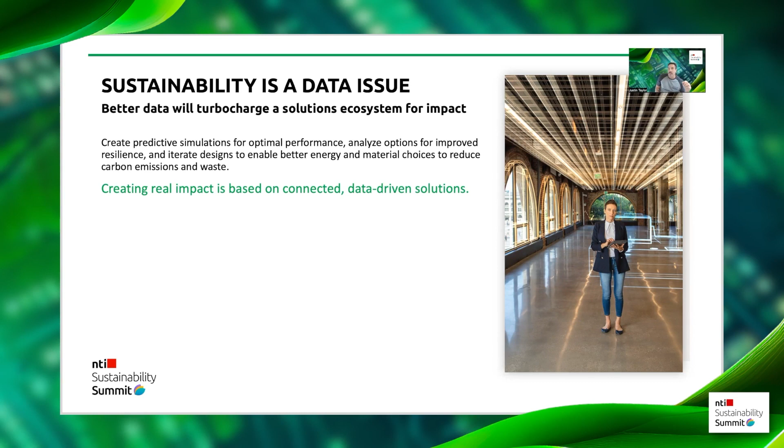Let's take an infrastructure twin. A lot of people are familiar with tools from Autodesk such as InfraWorks or Forma. But how accurate, what can we get out of these tools that allow us to understand the environment?

Here we have a model of the Autodesk office in Toronto, Canada. We can use the model generation tools to quickly bring in existing data to create a structure. But what is the accuracy of that?

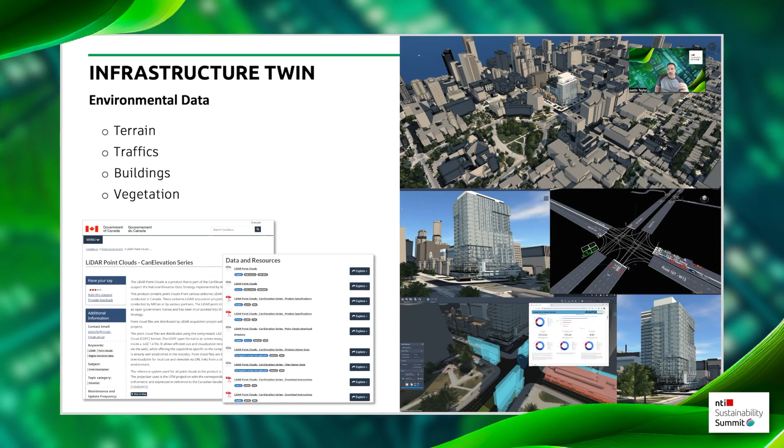What a lot of people don't know is that we can import additional data into these packages. So we went into the Toronto government website and downloaded the latest LiDAR information freely available from government. We downloaded all the information around the mature trees around the city, and the government's data analysis on how many vehicles are traveling at different times of day, the frequency, etc. All of this data is freely available and you can get it from most governments.

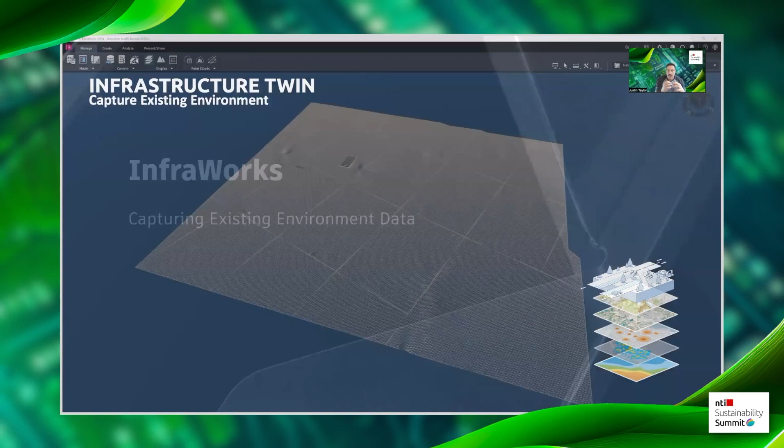That data was brought into InfraWorks, and this short video shows how that data can be brought in and layered to build up a very, very accurate, high fidelity replication of the city of Toronto.

Here we can see the LiDAR data coming in, accurate to around 2 meters on a grid. We can see the road network coming in. Next, we have the trees—these are the positions of the real mature trees around the city block around our office.

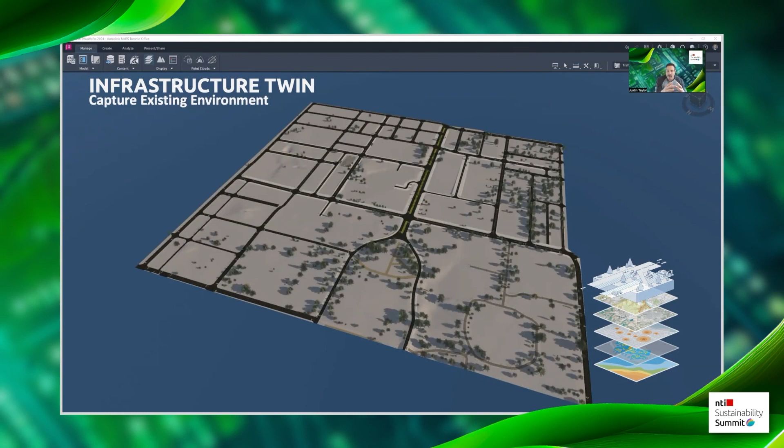And here comes the Revit model, the design model. The surrounding buildings are much more accurate than the standard ones InfraWorks can bring in. These were available, as I said, through the government website, giving us a super high fidelity model of the city.

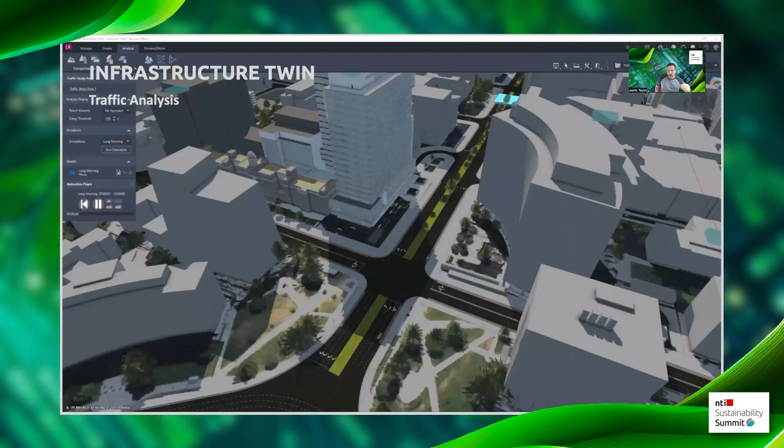But what next? In the same software inside of InfraWorks, we import that traffic data. InfraWorks has a very powerful traffic analysis engine. First, we can see the traffic and traffic flow around the junctions at different times of the day based on the government data.

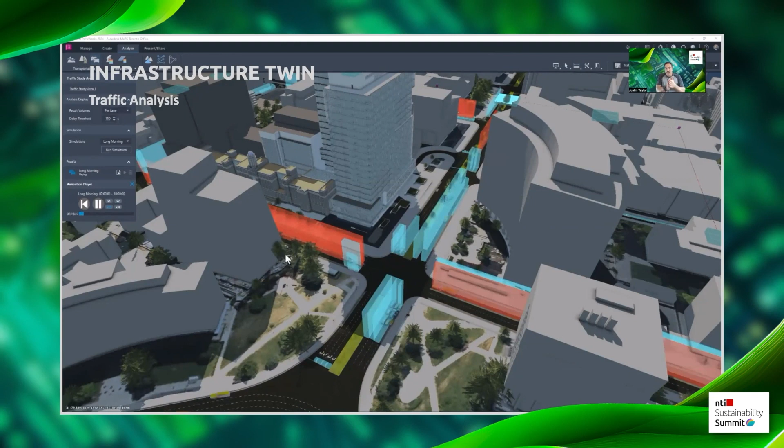We can start to see how the traffic is backlogging and sitting still with idling going on, so we can see the efficiency of a network. We can go in and play around with the junction design, or simulate traffic lights and changing of the sequence to see if we can improve this information. It is a very effective town planning tool in terms of logistics.

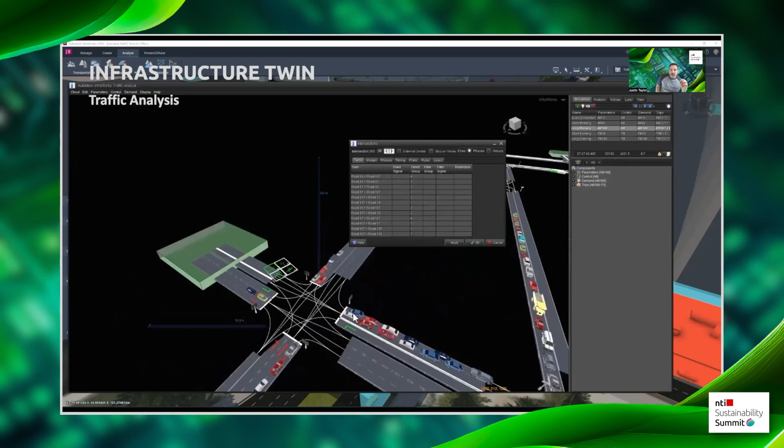The other thing InfraWorks can do on top of this is export that traffic information, so out to Excel we can export all the traffic data and the emissions. Here's an example where it's been brought into Power BI, to make it easier to digest.

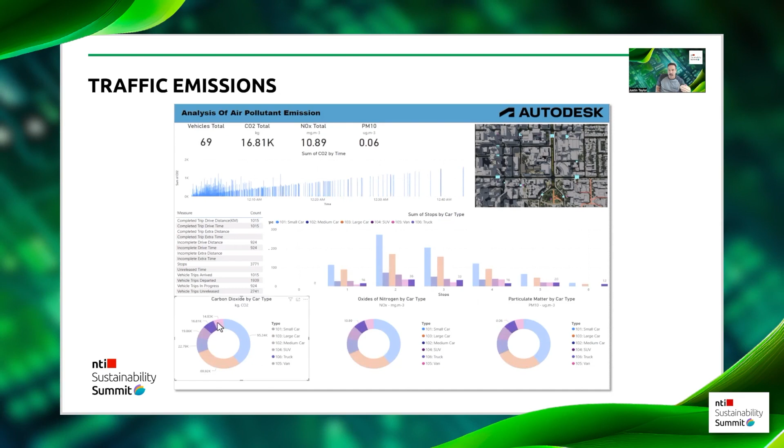We can see the number of vehicles, the CO2, the NOx, and the particulates at any given point of the day, and the type of vehicles producing those emissions, so we understand how polluted the area is. This is useful in existing scenarios or if we're building new layouts and new town planning, etc.

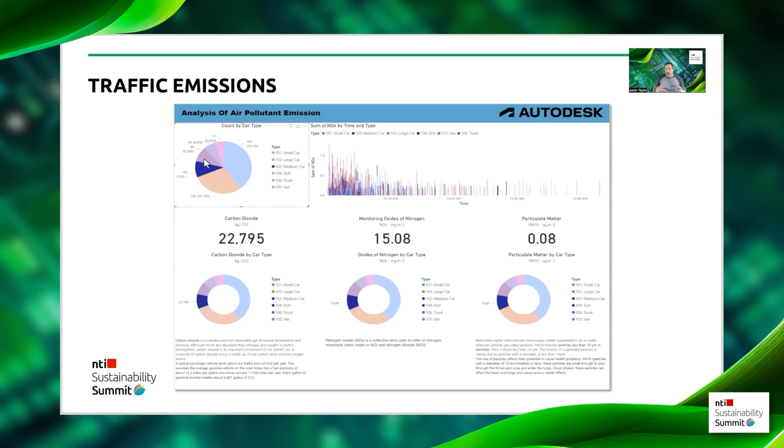Now we need to look at how we can mitigate this. In this example, we bring the same traffic information into Forma, and we can analyze the noise around the same junction around the Autodesk office. You can see here that in the area in front of the office, just off the road, we're getting up to noise levels of around 110 decibels, which is pretty uncomfortable for people and wildlife.

If we want to start creating biodiversity in our cities and improving the overall health and well-being, we need to reduce noise and pollution.

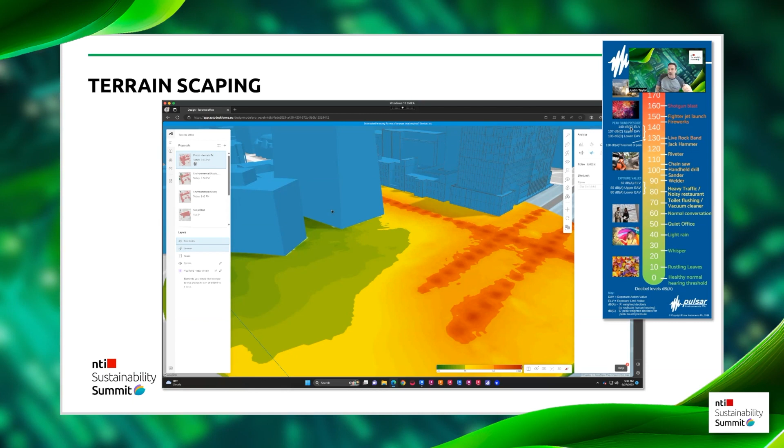One thing we can do is look at terrainscaping. Forma has a bidirectional link with Revit, and in Revit I updated the terrain to create a very simple earth bank or berm. I brought that back into Forma and reanalyzed it.

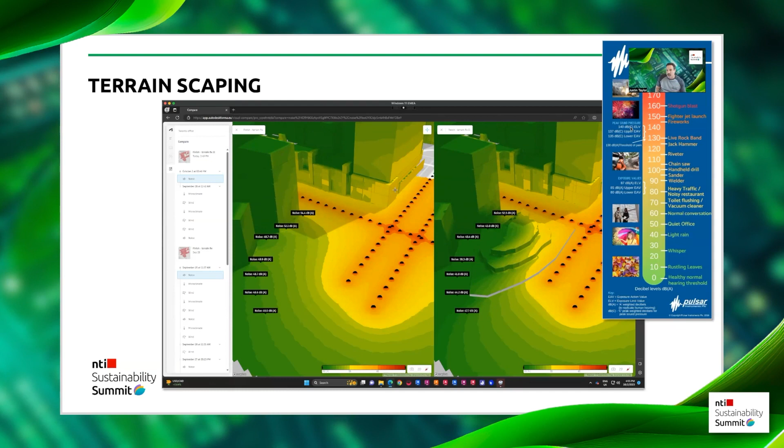You can see immediately there's a drop of around 10 decibels just through doing this, and that's not including adding planting or further sculpting. So we can see the noise level has come down.

We can also see that earthworks is altering the prevailing winds as they come in, again analyzed through Forma. We can see it's starting to lift up the air faster and away from street level, so the pollutants are being brought up. It's reducing wind speed and also lifting out the pollutants. So here we can actually see our design is having a positive impact through the analysis.

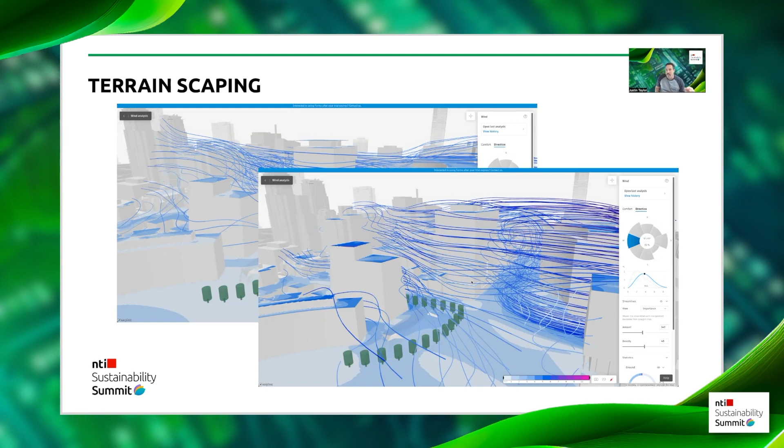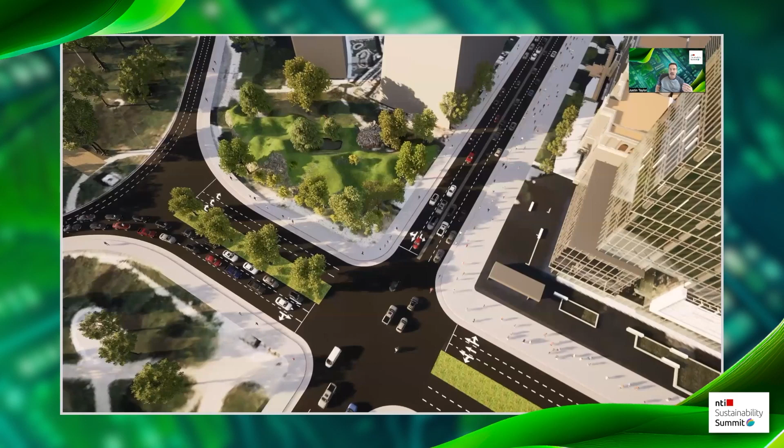Finally, that information from InfraWorks, the InfraWorks model is exported and brought into Twinmotion. This allows us to create high definition animations and visuals of what this design would look like, for planning reasons or community buy-in. It's also important to note that Twinmotion has libraries of indigenous plants for different regions.

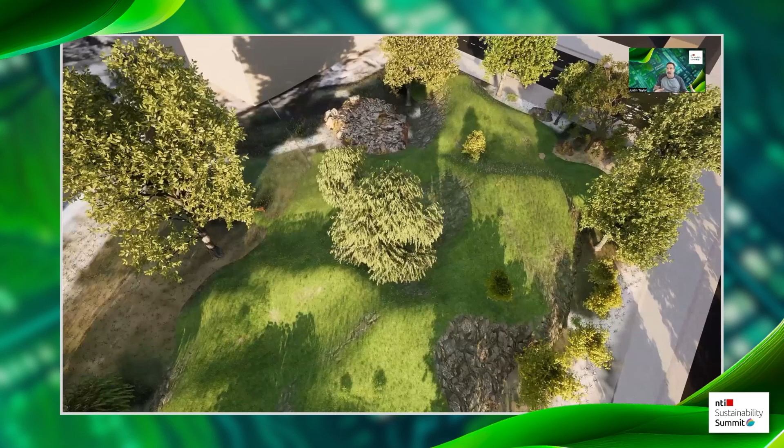So these aren't just any trees or bushes that are dropped down, these are ones that would actually grow in that environment. You can see how the overall site has a much greater aesthetic appeal. We're increasing biodiversity and reducing noise and pollution.

Other things we can look at: what if this was an existing building, but we wanted to invest in renewable energy? Well, again, Forma allows us to quickly analyze the overall site, the facades and the rooftops of the building, and understand the sunlight and the potential for photovoltaics.

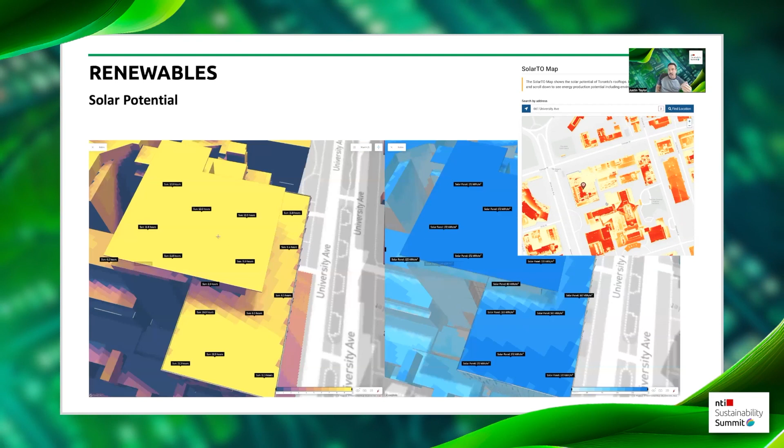The model can be brought into Revit and greater, more granular analysis can be done on different roof elements. So we can start to understand not only the PV energy production potential, but the payback time - how many years it's going to take to pay back on a particular asset.

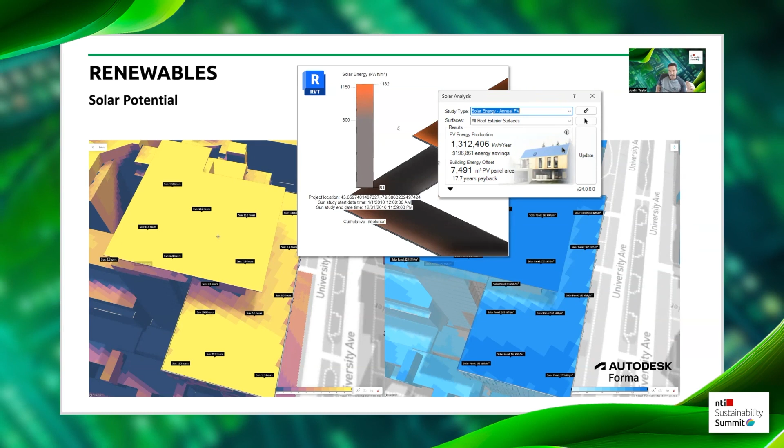We want to look at the life cycle, as I said at the beginning, this connected data from start to end. So what about the creation of the solar panel in the first place? Here I've modeled up the solar panel in Autodesk Fusion, a design and make tool, and I've used all the materials it would normally be made from - whether it's aluminium, steel, plastics, or the silicon cells themselves, they've all been modeled up.

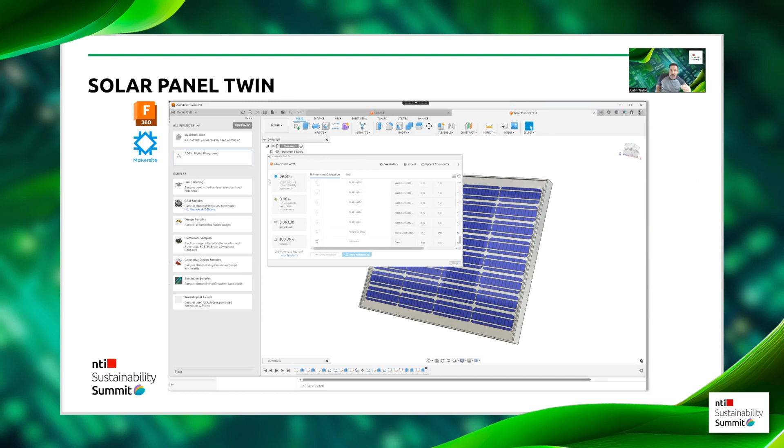I've connected the model to something called Makersite, which allows me to assess the embodied carbon of this design, so I understand what its footprint is as an object. I can then create an environmental product declaration for this. Not only that, but it's telling me the overall material and manufacturing costs as well, so I can start to weigh up different design options - cost versus carbon.

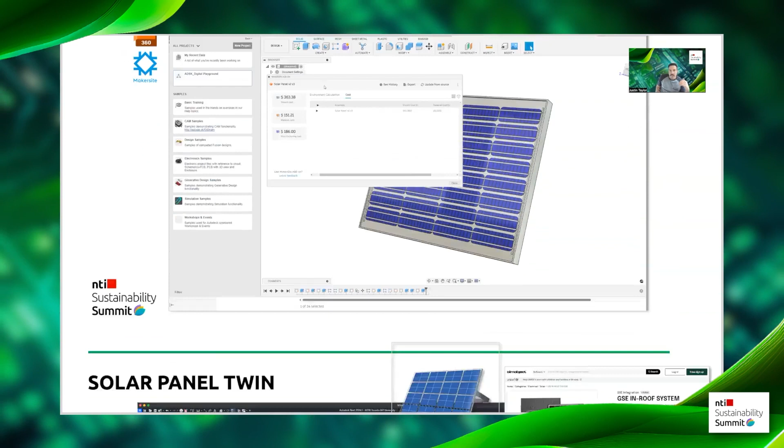From Fusion, I can export this solar panel and bring it back into Revit. I can position this on the roof accurately, rotate it and angle it to its true inclination, and then assess the photovoltaic potential of just the solar panels to get a greater accuracy of the energy I can produce.

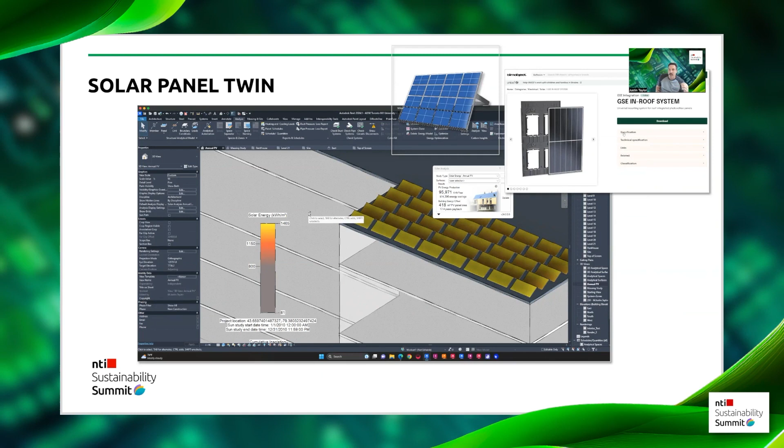Towards the end, the operation and maintenance, the life cycle, that same model from Revit can be pushed into Autodesk Tandem. It can be connected up with operations and maintenance documents, EPDs - environmental product declarations - and connected to monitors, sensors and feedback panels. So at any given point we can understand the energy being produced at any given time, and whether a solar panel is working optimally or not, or if there's a problem. So we're creating a digital twin of that building.

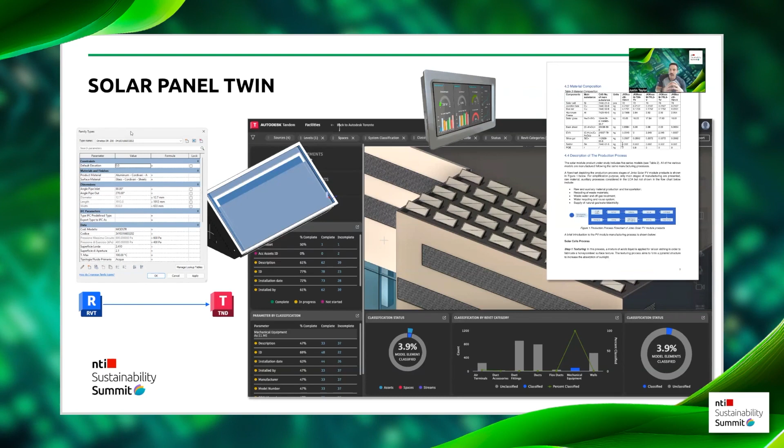So let's look at the life cycle and start to understand how data needs to be, or can be, connected to improve this overall life cycle. We hear a lot of talk about material passports. They offer sustainable material selection, health and safety improvements, value preservation, regulatory compliance and certification. But how do they work in reality?

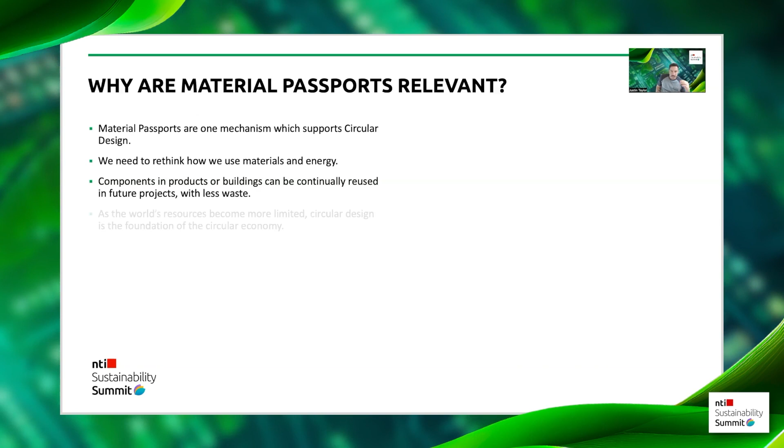Why are they relevant? Well, they're a mechanism which supports circular design, as I mentioned. They allow us to rethink how we use materials and energy - we want to start reusing and creating this circular environment. They allow us to understand the products or materials in the building that can be continually reused in future projects, i.e. less waste, less use of virgin materials or brand new manufacturing. And as the world's resources become more limited, circular design is the foundation for the circular economy. We have no choice - this is a route we need to go down.

This diagram shows on the left a traditional process where we take from the ground, we make, and then it goes into landfill - at the end of the day the building gets knocked down and goes into landfill. With a circular economy, we start off with resources, we manufacture, we consume and use, and we try to recycle or downcycle as much as possible.

So we're putting as little as possible back into landfill. On the right, there's an example from BAM. This was a building produced in conjunction with Arup. It's a circular house where they borrowed all the materials from a different project, and it was returned after disassembly, proving that it could be done.

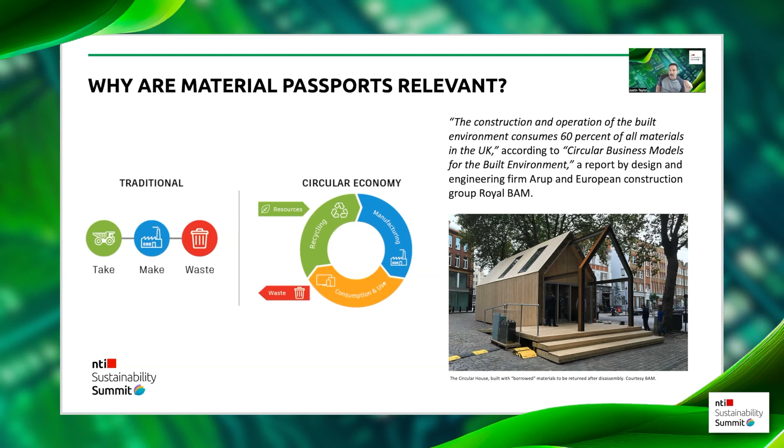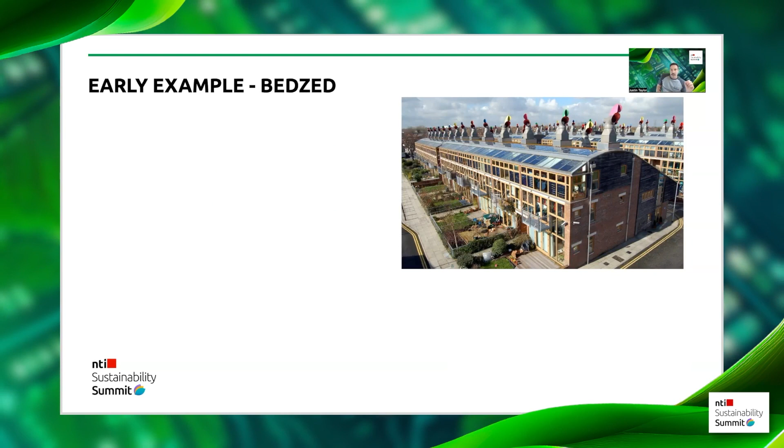There's been quite a few examples of circularity and reuse of components or materials. This is an early example from BedZED. Beddington Zero developed this housing development in Hackbridge, London. It was designed by Bill Dunster and Partnerships in conjunction with Ellis and Moore Consulting Engineers. They reclaimed 98 tons of steel for this development.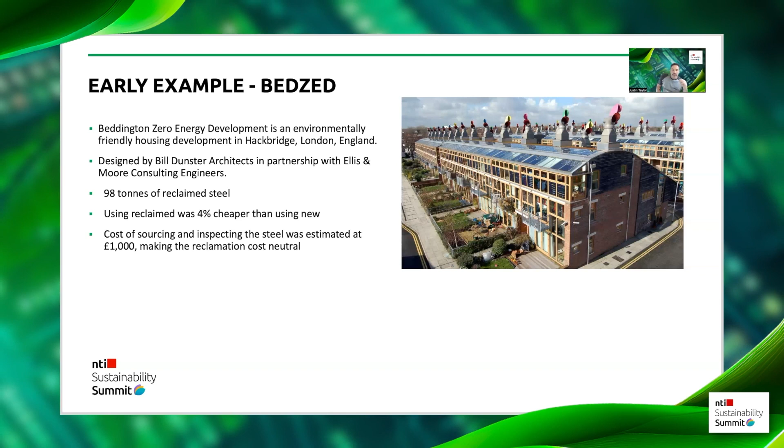They estimate it was 4% cheaper than using new steel, so there was a cost saving as well as the carbon saving. The cost of sourcing and inspecting the steel—because you can't just take something that was structural and reuse it, it has to be inspected to make sure it's right—they estimated was around £1,000, making the reclamation itself cost neutral.

81,500 kilograms of CO2 was saved for the reuse of that steel, and 2,500 gigajoules of energy was saved. So quite significant just on this one development.

Overall, 52% of the materials were sourced within their target radius in London. So they set out to understand what buildings were coming down, where they could get material to reuse it, and they set this target for the distance they would travel, because transportation incurs carbon costs through fuel, etc.

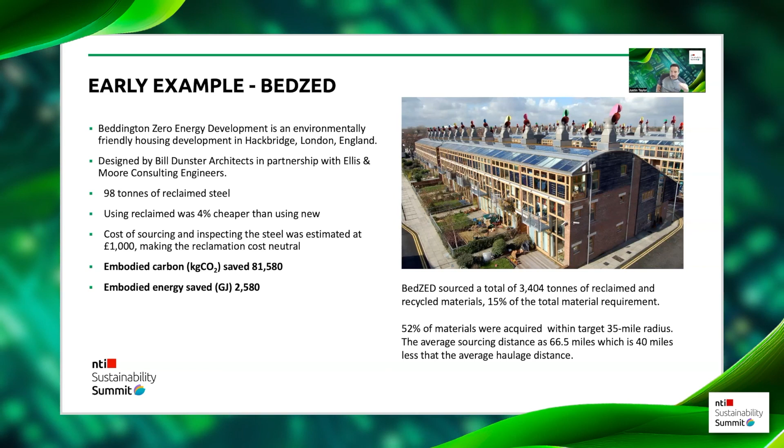Now, they did face issues. This was pre-material passports, pre-digital logbooks. Some of the issues they faced is that it required a team of people to source the materials. They had no way of knowing what buildings were coming down and where, so they had people calling around all the time. There was no centralized knowledge base, if you like. It required additional processes, such as inspecting the steel for any cracks or distortion, sandblasting, zinc treating it to make it rust-proof again.

A different way of thinking around this is that the structural engineer carrying this out now holds the risk associated with the integrity of the steel. And clients are not always willing to accept reclaimed elements. Not all materials are easy to reclaim due to the way things have been constructed.

So again, this is about our ability to change our mindset in the way that buildings are put up. We need to design for disassembly. The use of adhesives, for example, makes it very difficult to separate materials and reuse them. So the use of nuts, bolts, and screws is far better for recycling.

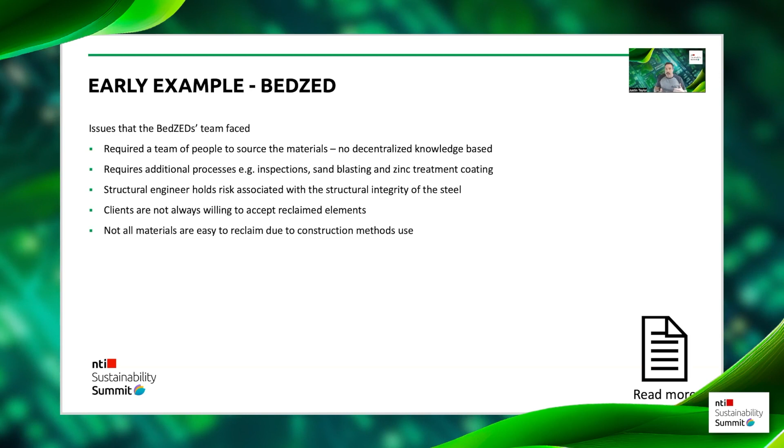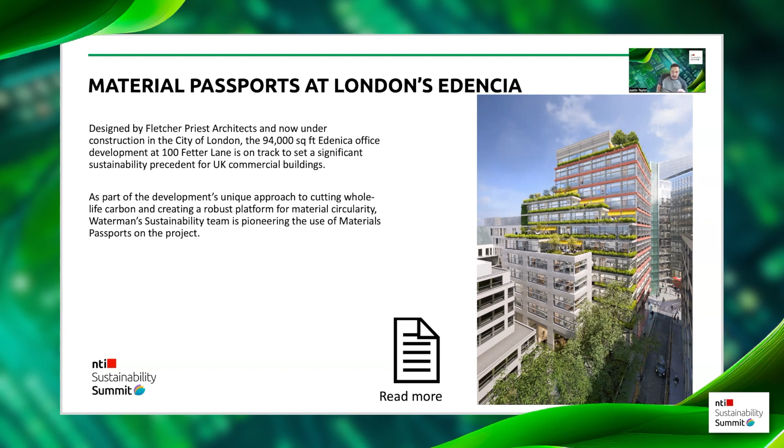Now, recently, Fletcher Priest Architects undertook a project, the Edencia office in London. As part of this development's unique approach to reducing whole life cycle carbon, they set out and developed a very robust platform for creating material passports on the project. This presentation will be made available to you, and there is a read more link that takes you through to the full article about this.

But at the end of the day, they created a platform for material passports that captures information. That information itself is wrapped up and encompassed inside something called a building digital logbook. So imagine it's like a supercharged digital twin of a building, and it contains all the material passports, which are linked to the individual elements, components, or materials inside the building.

A digital logbook is an all-in-one information tool designed to encourage data transparency and availability, and allows us to understand what the building contains, where it is, and how to access it. With the material passports, it also captures exactly what has happened to a component or building element throughout its life cycle. For something like an air conditioning unit—where it came from, the manufacturer, its embodied carbon, its operating requirements in terms of energy, how often it's serviced, has it been serviced—this entire history is wrapped up inside the material passport and then inside the digital logbook.

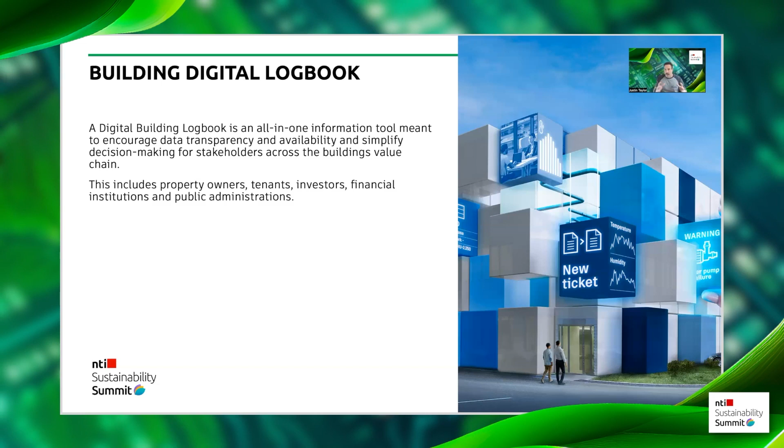Now, along with all of this data comes the problem of accessing only what you want and not being lost in a sea of data. We need to look at ways to construct and connect our data to make it readily accessible to those that need it.

Here's an example of a hospital head wall where all the gas, electricity, and medical equipment is connected into—it's a complicated piece of prefabricated equipment.

And it can be used by many different people, personas - the patient, medical staff, engineers, construction managers, mechanical engineers, etc. How do they only get the information they want about that component and not get lost in this sea of irrelevant stuff to them?

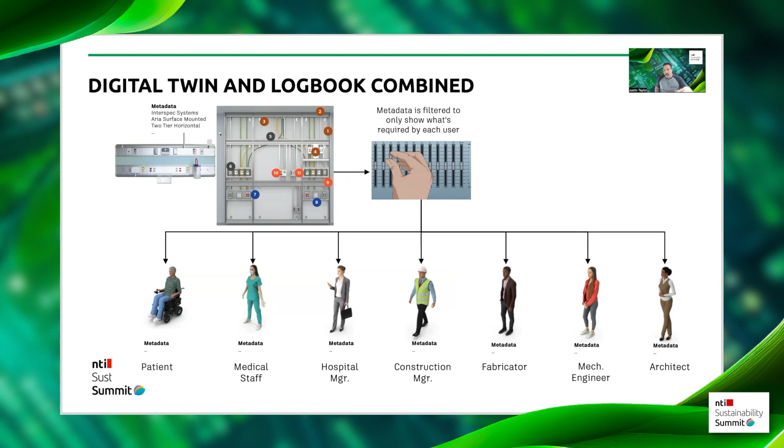Well, this is where two forms of classification come in. First of all, we have taxonomy, which a lot of us are familiar with. Software such as Revit does this very well, pretty automatically. We create a new project, call it a hospital, create zones, departments, and levels, then create rooms and put equipment in those rooms. Revit has the capability that the equipment already knows what room it's in, what floor level it's on, what department it's in, and what project it's in. So the taxonomy is fairly straightforward, and it varies slightly depending on the particular persona that's accessing that data.

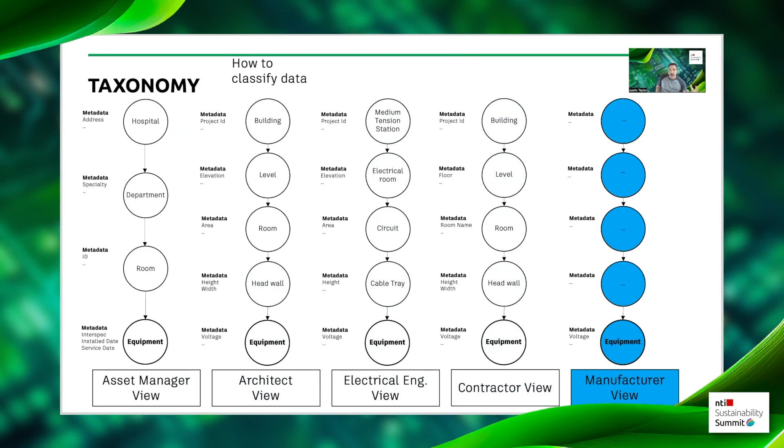But if we move forward with digital logbooks and digital twins, we also need to look at ontology, which is the way that we capture rules and constraints. This allows us to provide actionable insights. So the same head wall, imagine that it needs a power socket replaced. The taxonomy tells us that the power socket is in the head wall, in a wall panel, in a room, on a ward, in a department, on a floor, and in the building. So it tells us how to get there.

But in order to change that power socket, we need to understand that it's connected to electrical conduit with a wire in it. We need to understand all the information around that circuit. Where is that circuit connected back to? What switches or fuse boxes do I need to go to in order to isolate that circuit? Who else is it going to affect in the hospital, if anyone?

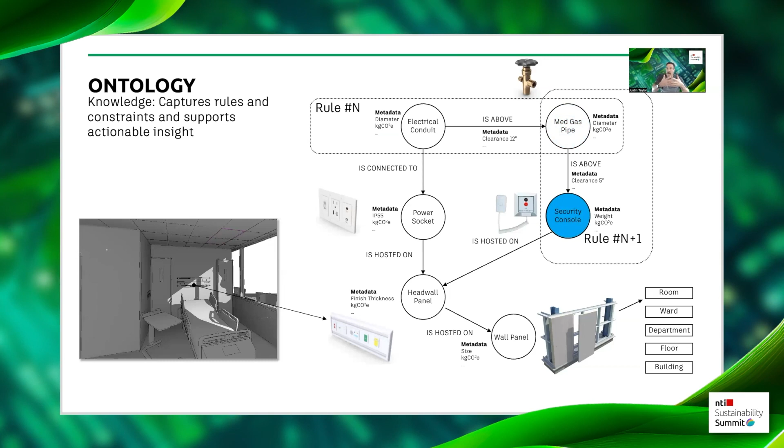Not only that, but if I'm working on that electrical conduit, I need to understand there is a gas pipe above it. Is there a risk that I could break that gas pipe? If so, I need to shut that gas pipe down, and again, where does that go back throughout the facility? What do I need to shut down? And the same thing with the security console. So there are all these rules that are interconnected, and they need to be built into the digital twin.

Here's just a quick final example of that kind of information coming into a digital twin. This is Tandem. You can see here there is a valve, a mechanical unit, that's been selected. It tells me all the information coming from Revit about its description, who it's installed by, the manufacturer, the model number. It shows me a link to the operations and maintenance manual, a link to the product data sheet, the EPD, the warranty documents. So I can go and filter and grab any information I need about that component very, very quickly.

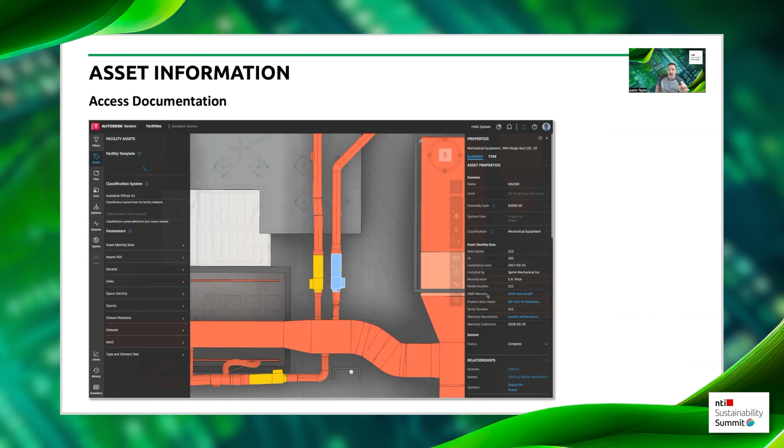And the documentation will open up.

But the digital twin can also act as a material bank. There is a terminology called BAMBS, buildings as material banks. So again, inside of Tandem, I can search for different types of material, and you can see the colorized image is showing me whether it's steel, whether it's concrete, whether it's brick, etc.

So again, if my building had a date where it was going to be decommissioned, and I was putting up a new building, I could do a search and say I'm looking for a certain type of steel. The digital twin would come back saying, right, this building contains that type of steel, this is where it is. And it could have documentation that explains how I need to disassemble that building to get to that steel. It would come along with all the material passports as well, if anything had happened or been altered during the lifetime of that building.

Here's the final slide again, showing a prefabricated slab. You can see here there is a link to the environmental product declaration, which brings up a unique identifier and tells me everything about that slab - what it is, what type it is, its dimensions, its fixing methods, so how can I take it apart, when it was manufactured, installed, and the amount of steel inside of it.

And it's controlled via a QR code. So from the manufacturer's site, up in the top right, you can see a photograph of those slabs. There's a QR code on there. We use the same QR code that is carried across onto the construction site, used by the contractors during installation, and used at any point throughout the building's life cycle, including disassembly, and if those materials can be used again.

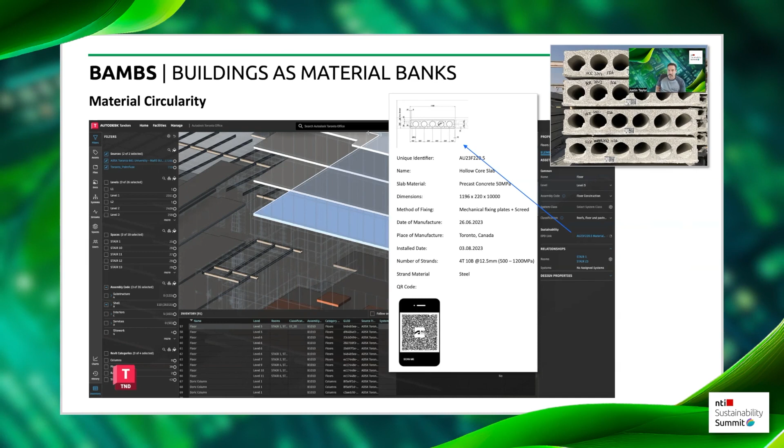As I said, we need to design for disassembly. What goes up must come down, and it needs to stop going into landfill.

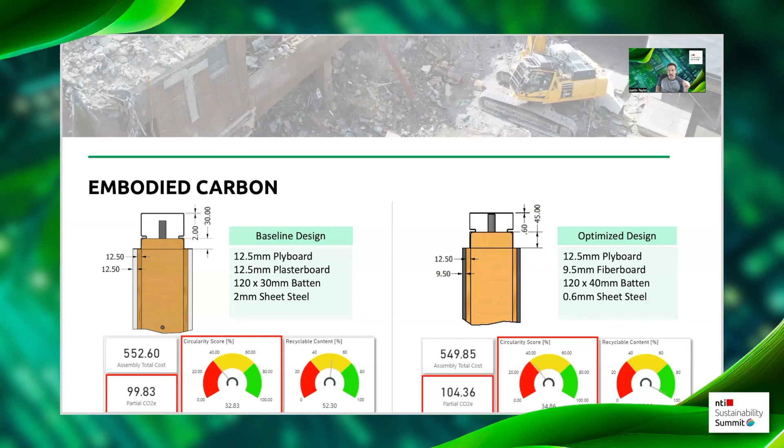We've got a number of ways of understanding how efficient a building is. This is a simple Power BI mock-up of a project I did with a client, where we created a capability that during the design process—these are prefabricated wall panels—the designer could test out different material types, whether it's plyboard, fiberboard, or the thickness of the sheet metal. The dashboard fed back, providing the designer with the embodied carbon and also the overall circularity score.

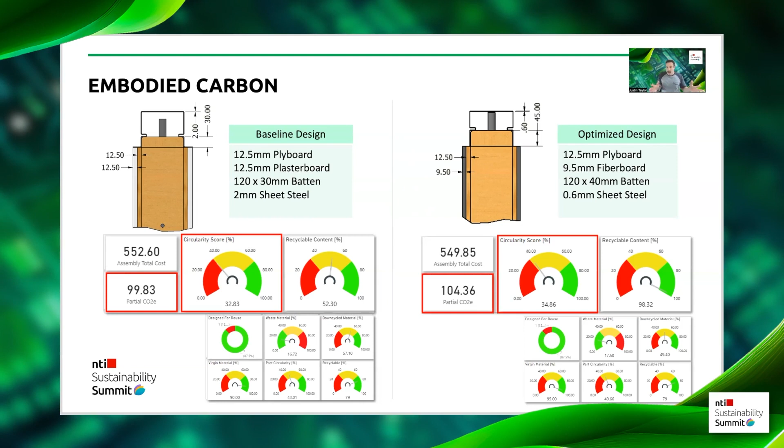How much recycled material is in there? Could it be recycled, downcycled, or reused? This provides the designer the ability to compare two different designs. You can see the design on the right has a higher embodied carbon score, and you might initially think we better go with the one on the left. However, the one on the right has a greater circularity score, so over its entire life cycle, it's actually the better option in terms of sustainability.

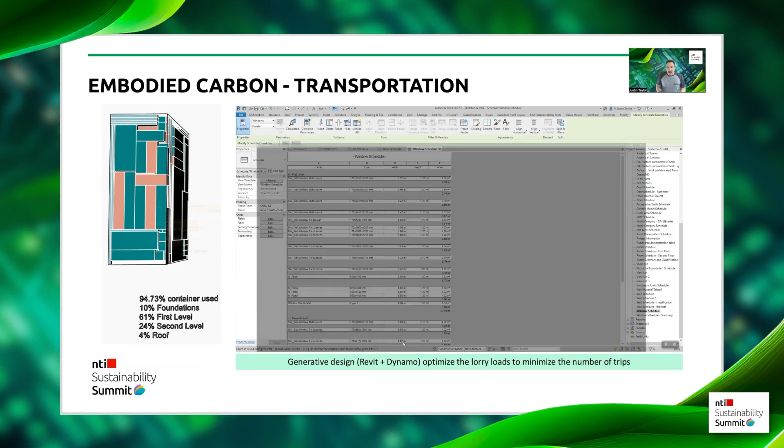We can do things around transportation. This is a Revit model of a house with prefabricated panels, and we want to understand how to get these panels from the factory to the site as efficiently as possible. Using Dynamo, we can create a script where we enter the size of the lorry and its capabilities for transporting bulk materials—we can set the width, the length, and the height of the container.

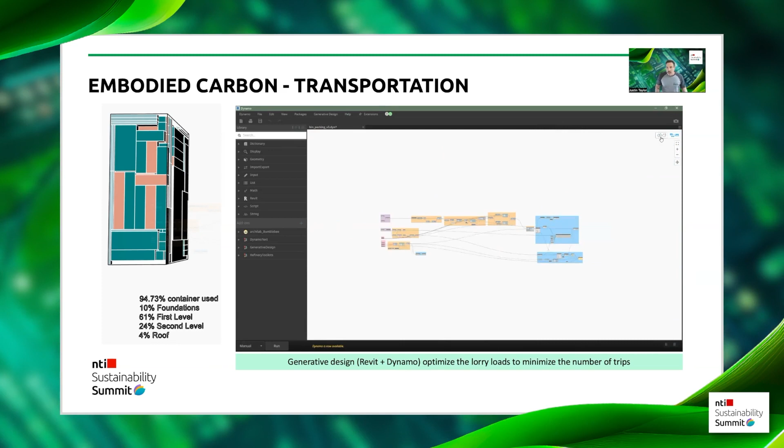It will look at the panels in the model, run an assessment, and tell us how many lorries we need and what needs to go into each lorry so we sequence the build of the house properly. Using Revit and Dynamo, we can understand in much greater detail the logistics required, and stop wasting trips with half loads or partial loads. You can see the number of containers and what needs to go into each one, in order.

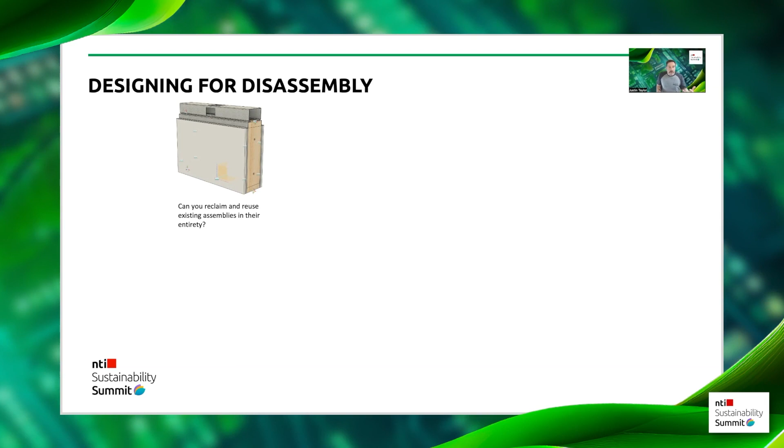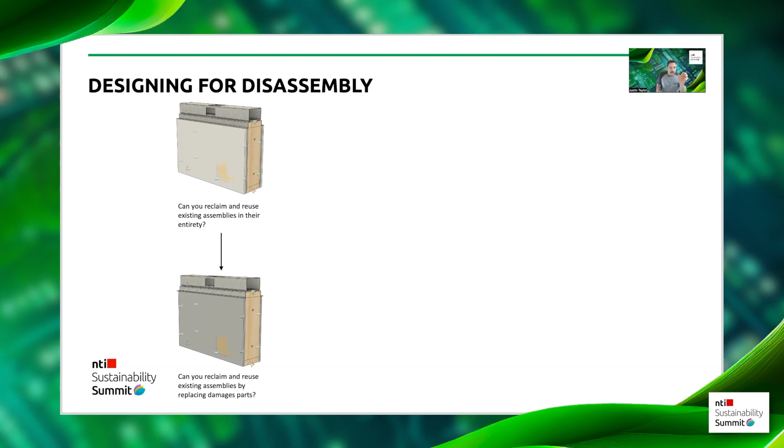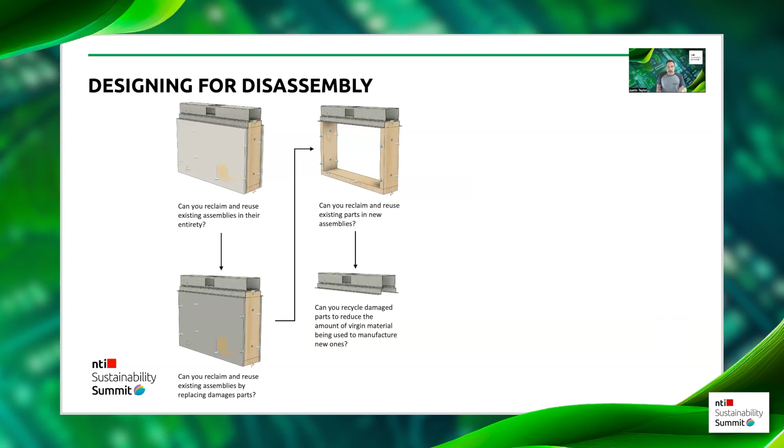This slide shows that same prefabricated panel, designed in Fusion in this case, so that it can be easily assembled and easily disassembled. A study was carried out for each element to understand how easy it is to take apart all of these individual components—reuse, reclaim, or recycle completely. If a part is damaged and made of steel, it could be melted down and reused, but if it's not damaged, it could go back in and be reused on a brand new panel.

Also, the way the panels are connected, they're slotted into steel connectors and then bolted. So again, there's no permanent fixture, no welding, no adhesives that would make it really difficult to take this building apart at the end of the day.

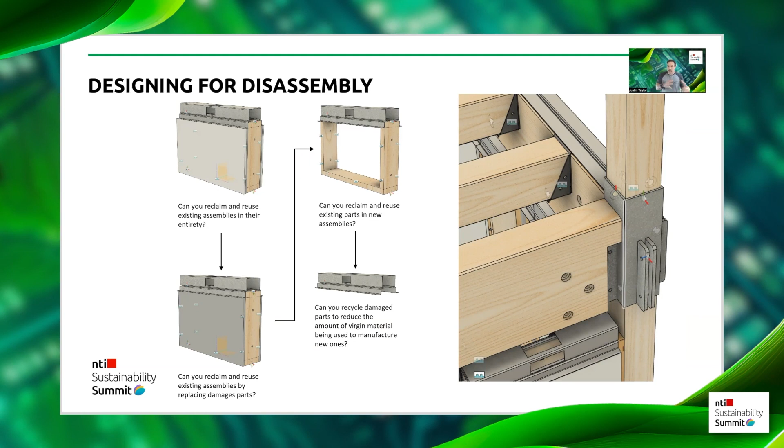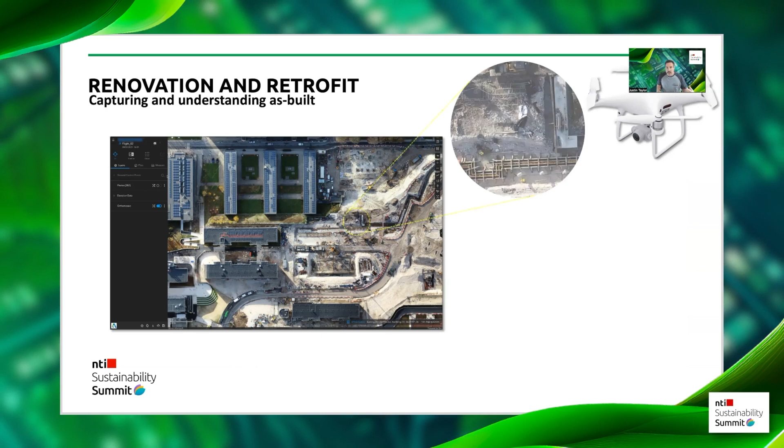In terms of renovation and retrofit, I think around 80% of existing office buildings require renovation and retrofit to meet energy requirements. It's a big task—how do you do that quickly? For external studies, I'm a big fan of drones and photogrammetry. They're able to capture large areas super quickly, very detailed, producing site orthos but also generating three-dimensional point clouds and meshes.

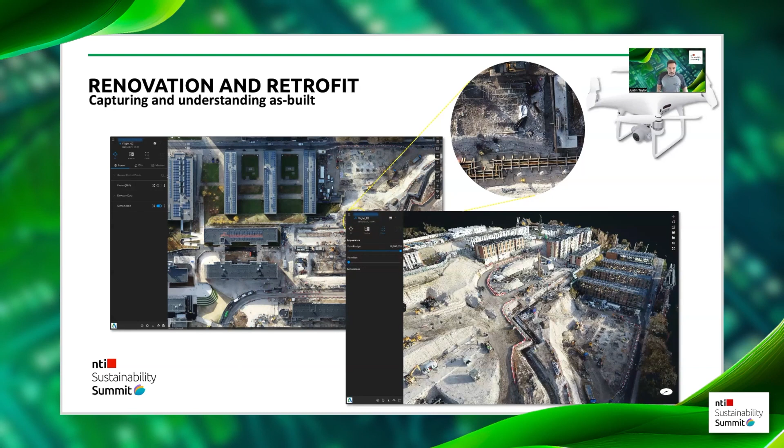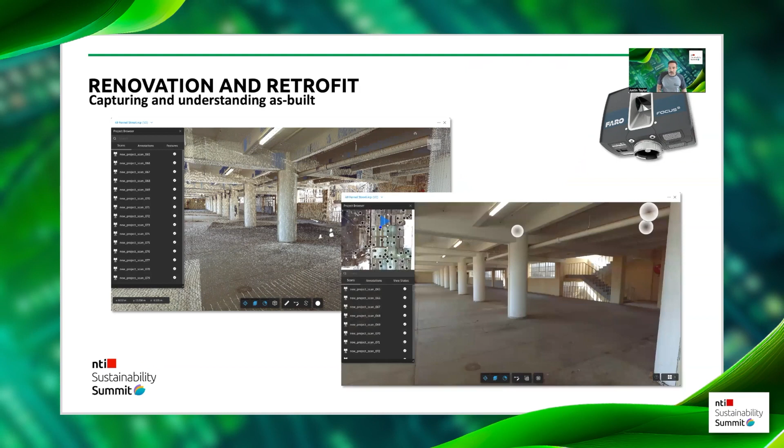That information can come into tools such as Forma and Revit, and we can reverse engineer. LiDAR, laser scanning, is known by most people, heavily used on internals where drones don't currently go. Here's the same building, an internal scan using laser scanning—you can see the quality of the images. That data can be brought into third-party products.

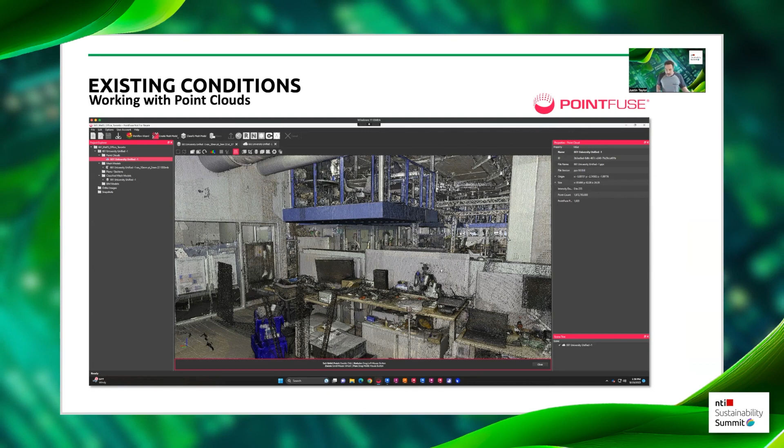This is a third-party product called Pointfuse that integrates with the Autodesk Construction Cloud. You can see the point cloud comes in. Point clouds aren't the easiest things to work with inside tools like Revit—it's hard to break them down, classify, and understand what's going on, and they're very heavy. So tools like Pointfuse allow us to create super lightweight, very accurate meshes automatically.

We can then classify those—this part of the mesh is a floor, this part is a column, this part is a ceiling. That data can come into Revit. Here you see the mesh coming into Revit, and on the right, we can see the hierarchy of those surfaces as they come in.

Now we can either model over the top and put real building elements in—walls, doors, windows, etc.—or if it's something we don't need to model, something that's not going to change, we can just add that surface into the Revit model, and it will be controlled along with the other Revit objects. So if we bring in a surface classified as a ceiling, it will switch on and off as we turn other ceilings on and off in Revit.

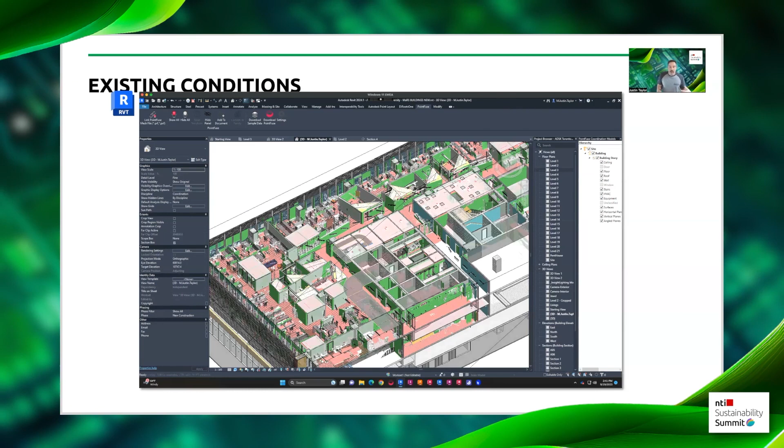This allows us to rapidly reverse engineer—scan to BIM—existing buildings and convert them into digital models that we can then produce digital twins of.

Just a few more examples.